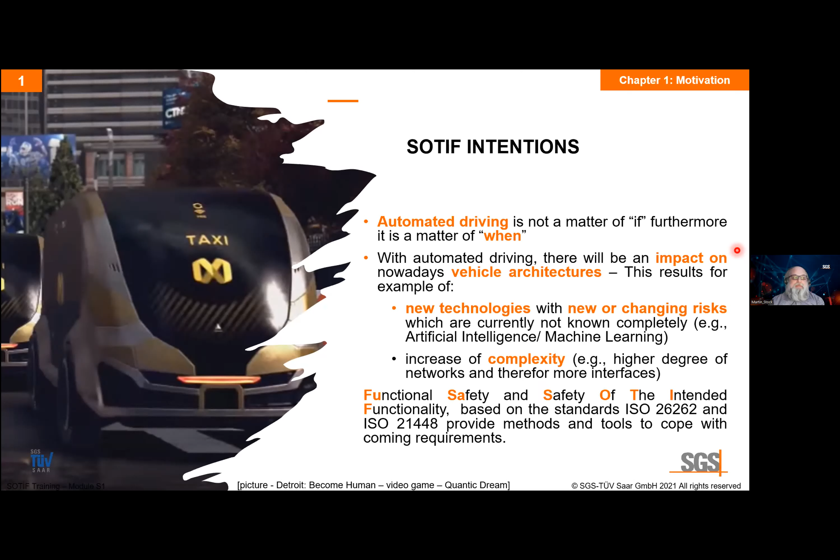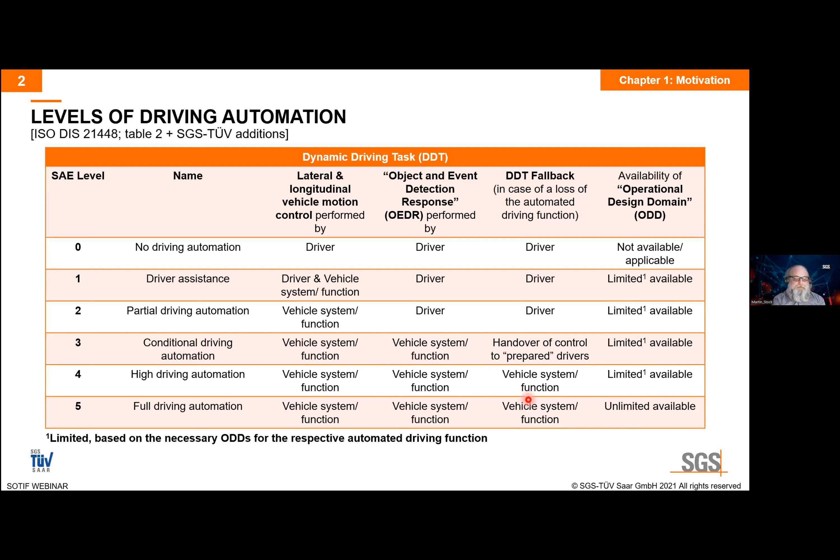So what is the operational design domain? And here I take the definition of SAE J3016 because the definition in the SOTIF standard is not so precise. I think this definition is a bit more elegant, let me say it like that. And the ODD is the operating conditions under which a given driving automation system or feature thereof is specifically designed to function, including but not limited to environmental, geographical, and time of day restrictions, and/or the requisite presence or absence of certain traffic or roadway characteristics.

So what does it mean? When the ODD is unlimited, we have a limit, of course. The limit is the world. So cars are not going to space. So we have a kind of limitation, which is our world. And the operational design domain is, let me say, a restricted set or outcome of the world.

So what we can do is we can do restrictions concerning the roads where the function is allowed to work. So for example, only on highway and not on country roads, not on city roads, not off-road. We can also put in restrictions concerning the vehicle speeds which are allowed, or environmental conditions like no snow and ice, no high temperatures, or no wet roads or something like that.

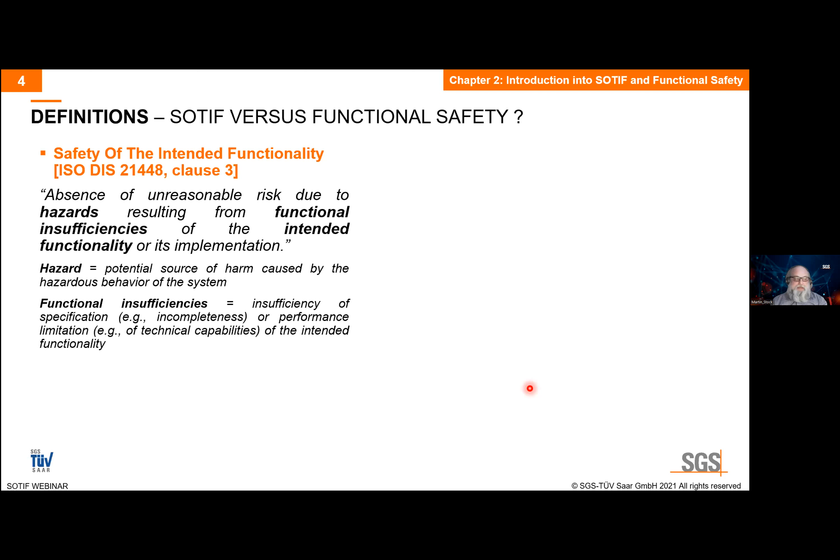We have a definition for hazard, which is a potential source of harm caused by the hazardous behavior of the system. And we have a definition for functional insufficiencies. These are insufficiencies of specification, for example, incompleteness, or performance limitations, for example, of technical capabilities of the intended functionality. And the intended functionality is a specified function on vehicle level.

When we have a look at ISO 26262, it is absence of unreasonable risk due to hazards caused by malfunctioning behavior of EE systems. Unreasonable risk is risk judged to be unacceptable in a certain context according to valid societal moral concepts. The term hazard is equal in both standards, and the malfunctioning behavior is a failure or unintended behavior of an item with respect to its design intent.

And of course, EE system is a system that consists of electrical or electronic elements, including programmable electronic elements. At least it is a set of sensors, controllers, and actuators. So what you see here is that SOTIF is inherently a part of functional safety, and therefore SOTIF based on ISO 21448 is a logical complement to functional safety as specified in ISO 26262.

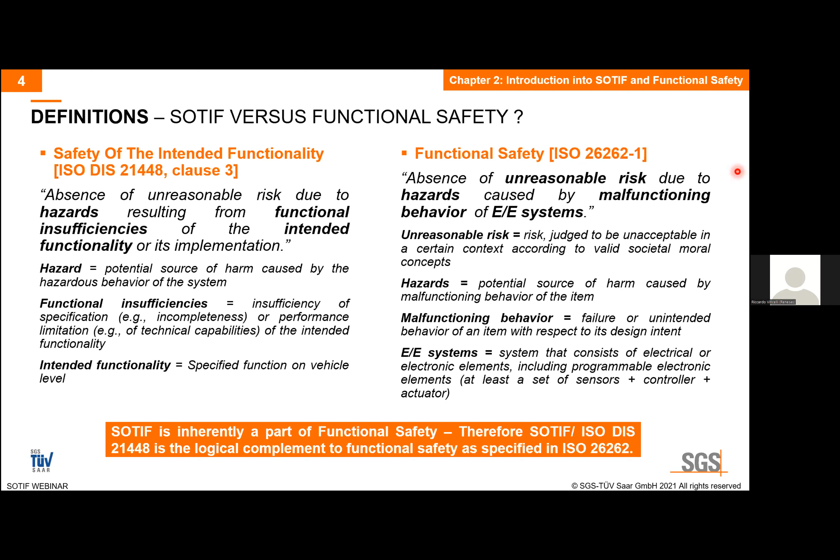So what are causes for unreasonable risk? When we have a look at ISO 26262, we have to observe the malfunctioning behavior of EE systems at vehicle level. So it could be unintended acceleration, deceleration, loss of acceleration, loss of deceleration, or in general, unintended vehicle motion.

When we have a look at the functional insufficiencies at the vehicle level based on ISO 21448, there we have incompleteness of environmental specification, for example, temperature areas, and incorrect specification of maximum vehicle speed or vehicle weight, for example. And we have the performance limitations, which can be a limited and not considered perception range of a sensor, or overestimated and therefore limited braking assistance, for example.

So dangerous situations due to functional insufficiencies in accordance with the SOTIF standard can lead to the same or more severe hazards as from malfunctioning behavior in accordance with ISO 26262, or they can cause new, previously unknown hazards.

So let's talk about the safety issues causality classification scheme, which shows directly what is part of ISO 26262 and what is part of the SOTIF standard. So in general, we have functional safety issues. These are subdivided into causality class 2, which is related to random hardware issues, so random hardware faults. And we have causality class 1, which means systematic related issues.

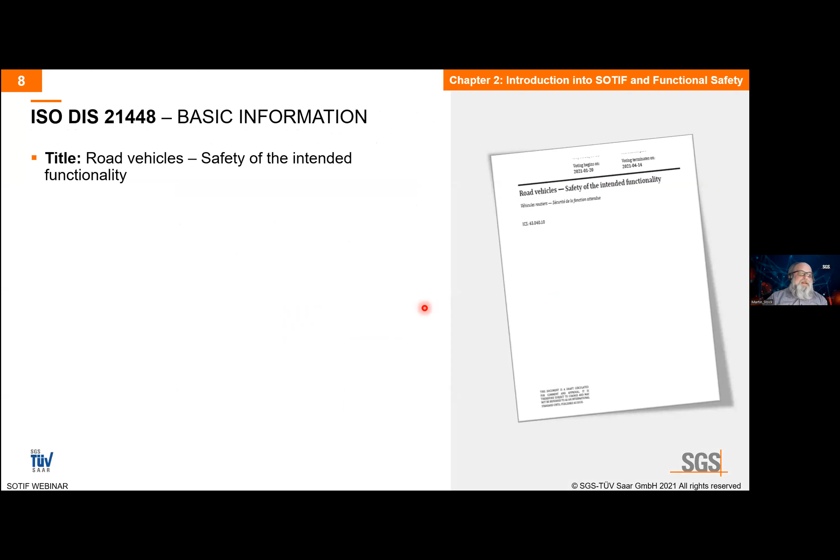So let's talk about the standard itself. Title: Road Vehicles, Safety of the Intended Functionality. The actual version which is available is the draft international standard. Still valid version is the ISO PAS 21448 from 2019. And this presentation is based on the DIS version from 2020. Just a hint for you, the PAS version has 68 pages and the DIS version has nearly 180 pages. Normative content are the clauses 5.1, 6.1, 7, 8, 9, 10, 11, 12, and 13 with their work products. All other clauses are only informative.

And which is also new in the DIS version, we have tables there. The intention of the tables is to support the development activities by providing measures and methods which can be used for specific activities. But the methods and measures listed in the tables are not weighted regarding their priority of application. So the tables you know from ISO 26262, where we have recommendations of use, you will not find in the SOTIF standard.

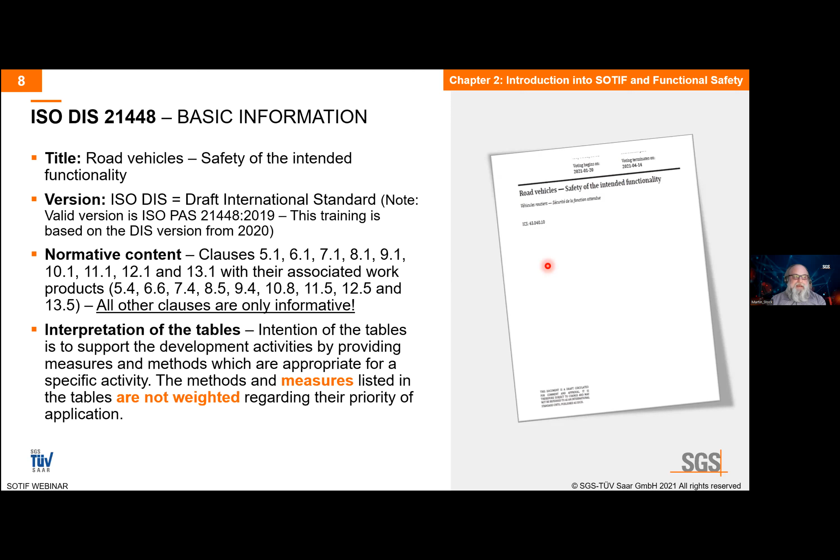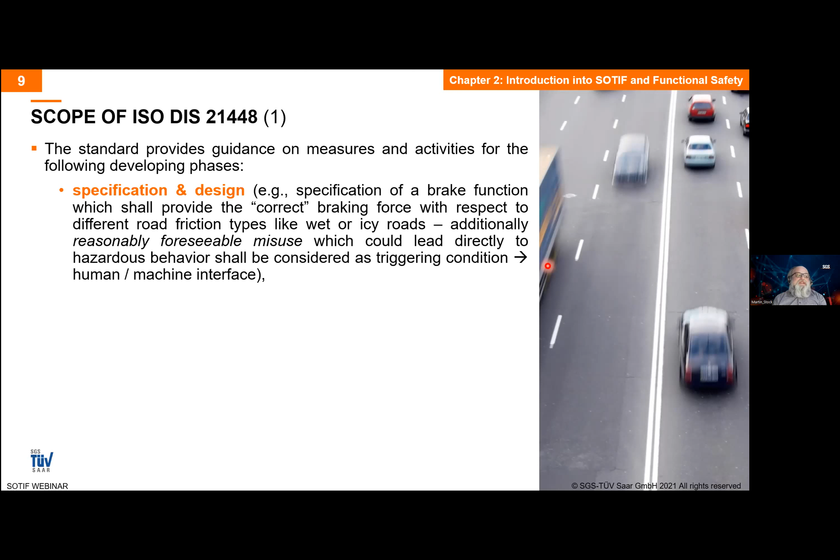What is the scope? The standard provides guidance on measures and activities for the following development phases. First is specification and design. So for example, when you specify a brake function, which shall provide the correct braking force with respect to different road friction types like wet or icy roads. Additionally, reasonably foreseeable misuse, which could lead directly to hazardous behavior, shall be considered here as a triggering condition.

Then we have the phase verification. So reviews, test cases which cover all relevant scenarios, or injection of potentially dangerous triggering conditions. Validation, for example, long time tests, and operation field monitoring of SOTIF incidents. And this is for functionalities where proper situational awareness is derived from complex sensors and decision or processing algorithms, for example, for automated emergency intervention.

The standard is applicable to an intended functionality where proper situational awareness is essential. And the standard says that it can be used for automation levels 1 to 5. I personally disagree with that. The standard fits very perfectly for level 3, not so perfectly for level 4, and from my personal perspective, not for level 5, but it's my opinion.

So compliance with local driving laws, policies, or other road norms is excluded, but cases where not following laws and rules of the road could lead to safety hazards are in scope. Sorry. Other safety domains, for example, hazards caused by other technologies like mechanical systems, are excluded. For these, you shall use other standards, for example coming from the Machinery Directive, EN ISO 12100, and so on. And hazards caused by attacks, so security hazards, are also excluded. Therefore, you have to take a look into ISO SAE 21434.

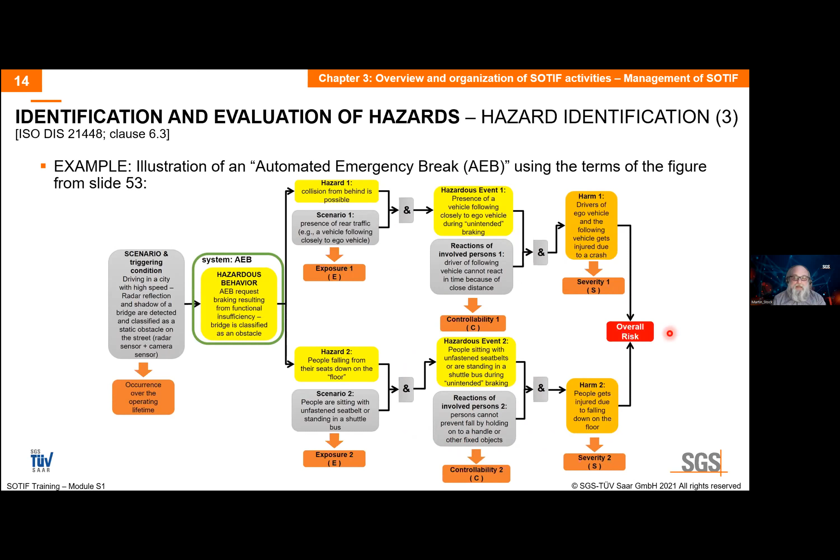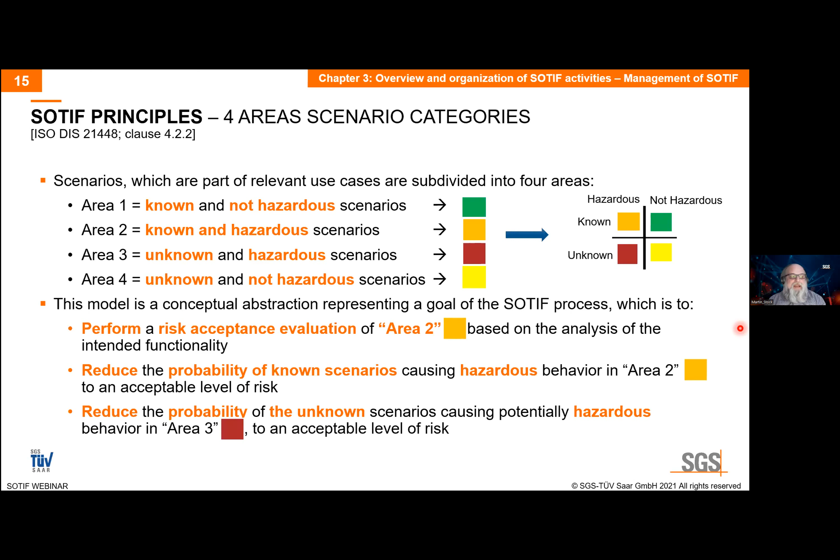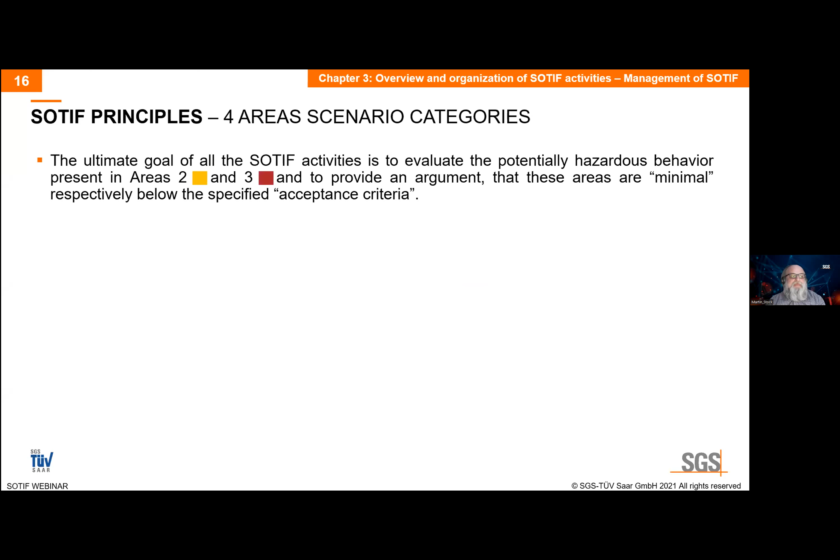And we have to reduce the probability of the unknown scenarios causing potentially hazardous behavior in area 3 to an acceptable level of risk. So ultimate goal of SOTIF activities is to evaluate the potentially hazardous behavior present in area 2 and 3, and to provide an argument that these areas are minimal, respectively below the specified acceptance criteria. So we want to change this to this. And it is expected that the residual risk will be reduced in the areas 2 and 3, and the confidence of safety will be increased by the growing scenario set in area 1.

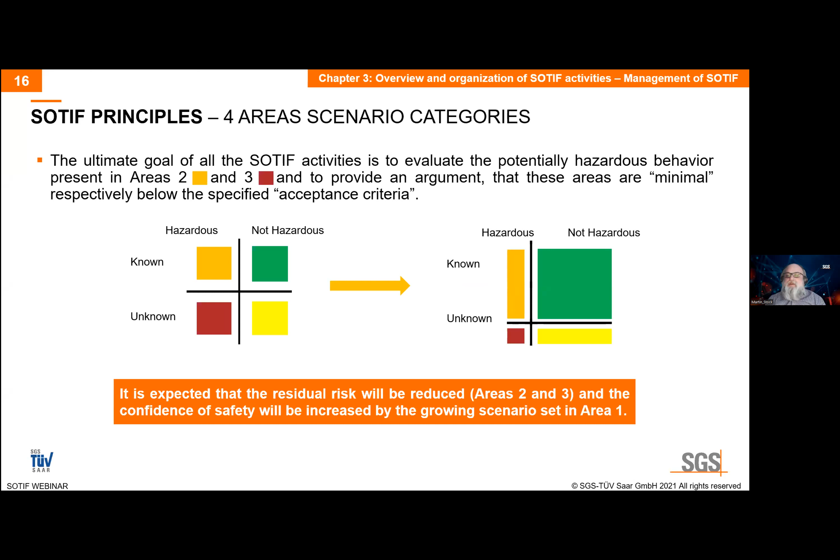So, summary of the activities. Area 1: here we want to maximize or maintain the set of known scenarios while minimizing areas 2 and 3, retaining or improving the safe functionality. Area 2: we want to minimize this area with technical safety measures to an acceptably low level with statistical significance. And we evaluate the potential risk and move the hazardous scenarios to area 1 by improving the function or restricting its use. It's also an option we can do.

Area 3: we want to minimize this area as much as possible with an acceptable level of effort with statistical significance. The problem is that we don't know how many unknowns we have. So the question of what is an acceptable level here, when I don't know the whole amount of these areas or hazards, makes it very difficult. And area 4: if unknown, not hazardous scenarios are discovered, they can be documented and reported, and this helps to maximize area 1.

The last principle: the sense, plan, act model. The hazardous behavior is closely related to the performance of sensing the environment, planning of actions by using decision algorithms, and providing an action where the HMI is included. To provide the intended functionality correctly and safely, we always have to talk about sense, plan and act. So the appropriate selection of a capable system architecture is a very important consideration to ensure SOTIF and overall capability, and corresponding activities take place both at early stages and throughout the whole development lifecycle.

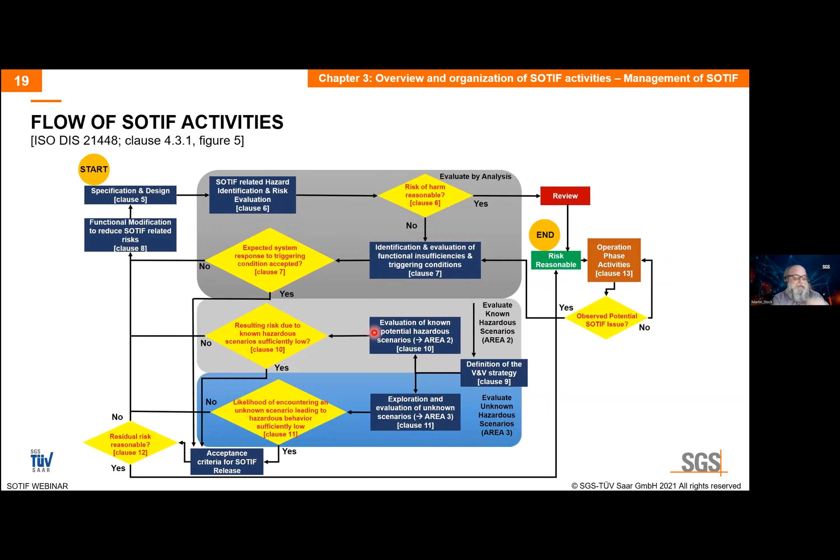Then I have to evaluate the known potential hazardous scenarios, which was area 2. If the resulting risk is sufficiently low, I can go to the acceptance criteria and operating phase. If not, I have to do modifications and make this loop again. Same for the unknown scenarios. When the likelihood of encountering an unknown scenario leading to hazardous behavior is sufficiently low, I can go directly to the operating phase. If not, I have to do some modifications.

So when we talk about safety of functions, we have to do some activities, supporting processes, and of course management. When you want to be complete, you always start with quality management, for example based on ISO 9001, IATF 16949, or ASPICE. Developing a safe product is not possible without a strong basement, so a quality management system or process is absolutely required. Then we have general safety management based on standards, for example the machinery directive, to cope with mechanical safety, chemical safety, electrical safety, and so on.

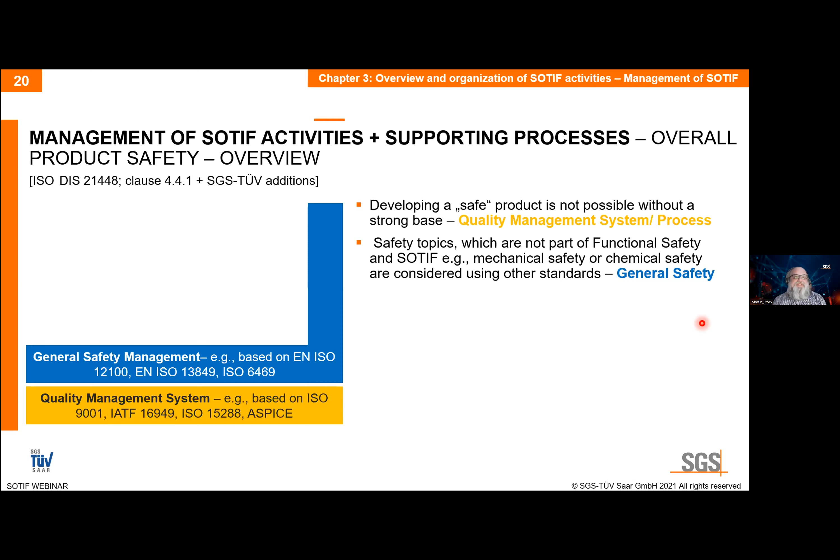Then we have the safety of functions, which is always a combination of functional safety based on ISO 26262, SOTIF 21448, and security ISO 21434. So functional safety of ISO 26262 is now only a part of the safety of functions. When you want to make functions completely safe, you have to talk about these 3 standards and this type of management. And on top, for automated driving, we have a lot of standards which are still in work, for example ISO TS 5083, I'm part of this group, which is safety and security for automated driving. Then we have ISO PAS 8800, which is an AI-specific standard for automotive, and other standards.

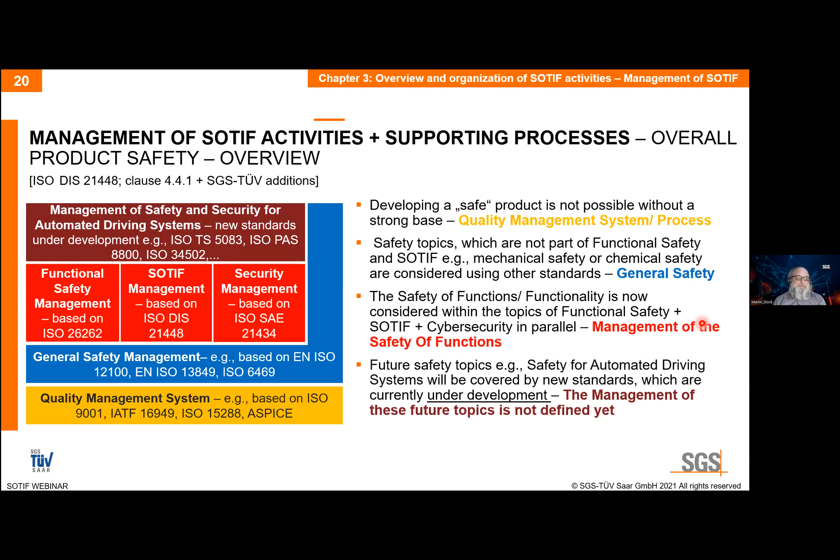So let's talk at the end about AI-specific content of the SOTIF standard. Safety for machine learning hardware: following the SOTIF standard for hardware safety of machine learning applications, ISO 26262 and SOTIF shall be considered, to cope with random hardware faults and systematic hardware faults following ISO 26262 part 5, and performance limitations following ISO 21448. Then for software, tools used as part of the offline training process, for example, are handled by ISO 26262 part 8 clause 11, confidence in the use of software tools.

Machine learning, they say, is some form of software which generates an output from the input using specified computing operations, like matrix multiplications, discrete convolution or nonlinear functions. To this effect, it's by itself not different from other non-learning algorithms and can be verified by conventional means. This means the implementation of computing operations can be verified according to ISO 26262 part 6.

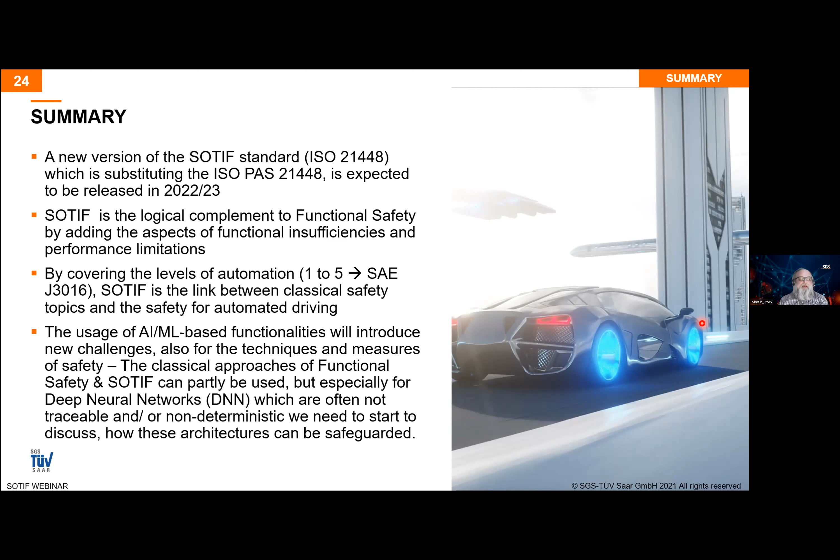safety. The classical approaches of functional safety and SOTIF can partly be used as seen before, but especially for deep neural networks, which are often not traceable and/or non-deterministic, we need to start to discuss how these architectures can be safeguarded.

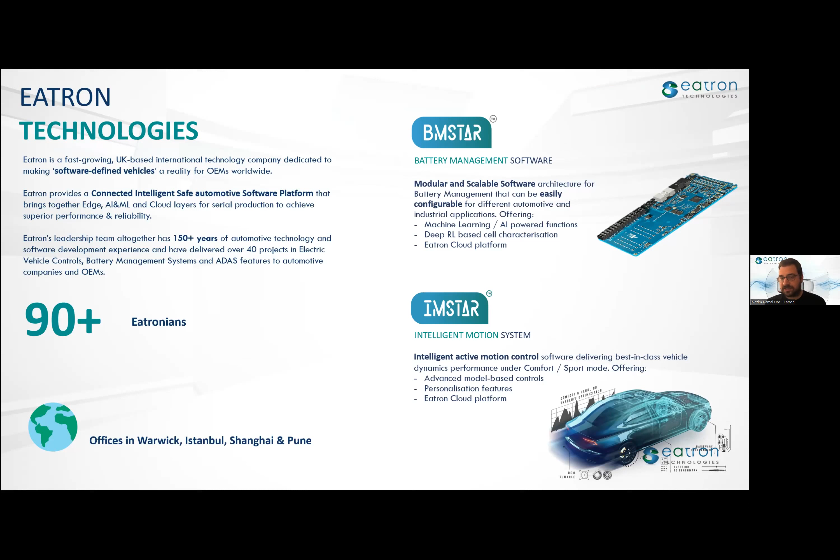So one of them is a BMS software, which has a lot of AI functionalities. Then the other one is a motion control system, IMStar, which also has a lot of AI functionalities. So just briefly to talk about this, in the battery management systems, what our AI systems are doing is basically smart battery cell diagnosis and remaining useful life prediction. And we are developing a lot of machine learning software to perform these tasks very accurately.

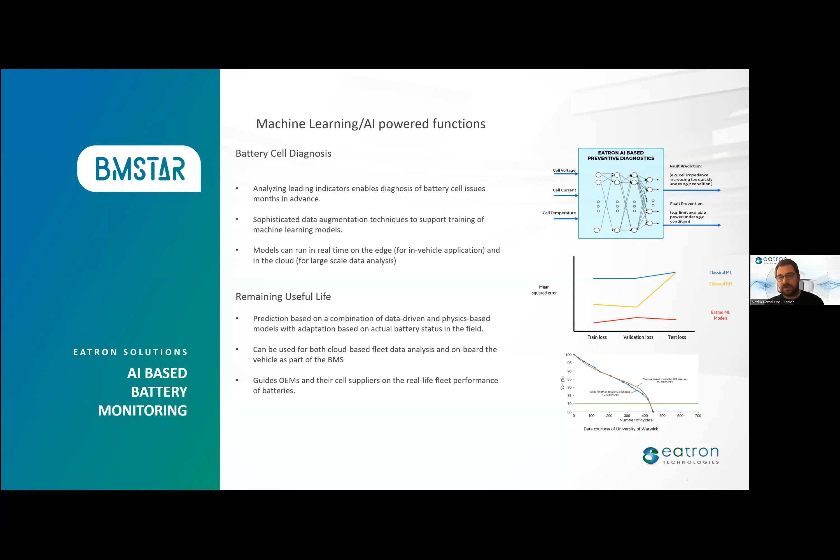By using data from lots of different resources, we can highly accurately predict the remaining useful life of your current battery, or if something goes wrong with your battery, how you can diagnose that, etc.

And the other product, IMStar, is basically like an ADAS system. So we have got a perception system installed on the vehicle, and it can actually detect road conditions, whether the road is bumpy, or there's a hole on the road, or there are dangerous driving conditions, and it can automatically adjust the motion control software, the suspension control system, to accommodate for that.

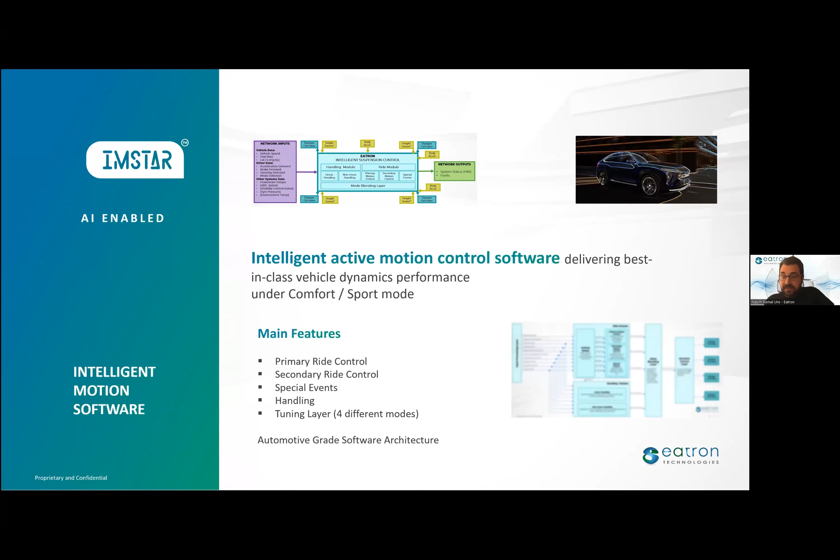So it is a combination of perception and decision-making AI. So these are the two products we have, and we have been applying AI to them a lot. And obviously, addressing the performance verification and safety is a big challenge for us, and we have been actively working on that too.

So first of all, I'm going to take a look at a little bit of the general scene regarding autonomous vehicle technology. So why it is so hot right now. What are some of the recent advances? Since I know this audience is actually very well versed in that topic, I'm going to keep this short.

And then I'm going to move into more the technical part, like what are the challenges we have in verification of safety and performance of these autonomous vehicles? What are some of the algorithms that are out there? What are some of the approaches for verifying the performance? And then finally, I will talk a little bit about the research we do at Eatron Technologies in order to address these problems.

Okay, maybe this doesn't need the introduction, but of course, we all know that in autonomous driving technology, there were tremendous improvements in the last 20 years, maybe more so in the last 10 years. So now we've got perception systems that can simply look at the road, and they can infer the state of the traffic. They can even predict how the traffic is going to flow, whether there are pedestrians on the scene. Are they going to make some hazardous moves?

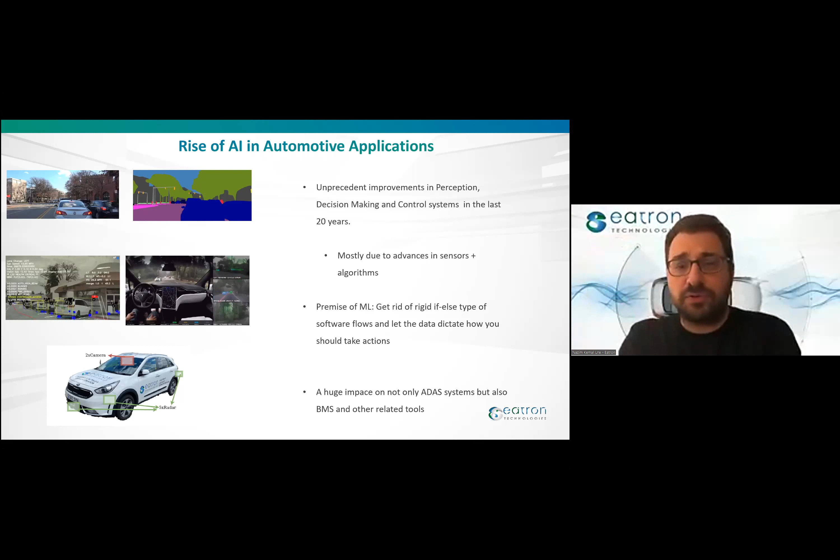We also have amazing perception, decision-making and control systems that can very accurately control the car up to some specifications. So these were kind of like dreams 20, maybe 30 years ago, but now it's a very strong reality. And this is mostly due to advances in sensors and algorithms, especially advanced sensors and hardware. They came a long way. So now we can collect much more reliable data. We can process data much more reliably.

But on top of that, we also had amazing algorithmic improvements in the last 10 years, mostly thanks to machine learning and especially deep learning. So advances in deep neural networks, the algorithms and the way we train them, enabled us to solve perception and decision-making problems to unprecedented levels that we haven't seen before.

And if you look at the premise of machine learning, like why machine learning is so useful for a problem like this, this is actually my personal opinion. Different people might find different uses of machine learning, but to me, the biggest advantage of using a machine learning system is that it actually kind of frees you from writing these conditional statements in your software.

So whenever you engineer a system using a classical way, that system is only good up to your specification of your parameters. So the system is not going to work right all the time. So what you need to do is write all of these conditional if-else like statements, right? You are going to say that, well, there is this edge case. If we encounter this edge case, we are going to use these parameters. If we encounter another edge case, we are going to use that set of parameters.

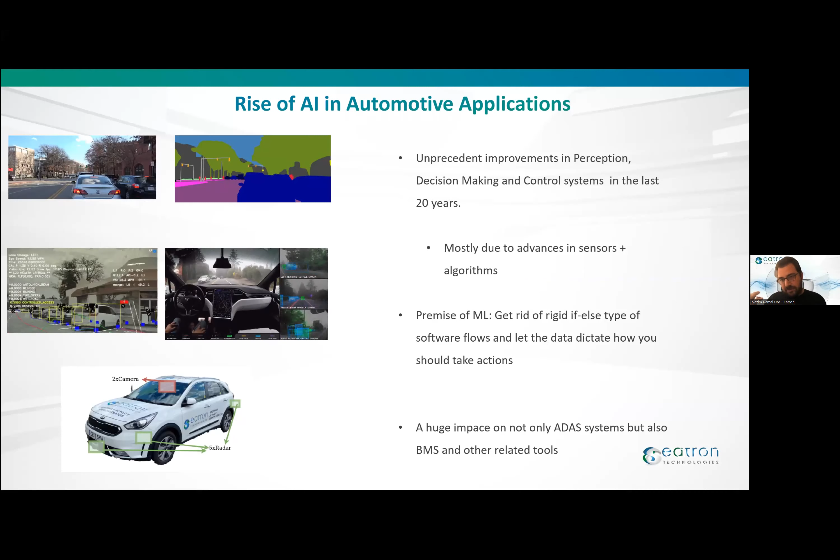This has a lot of benefits, especially in the environmental and social impact. Usually autonomy and electric vehicles go hand in hand together. So there's also a lot of environmental benefits, but of course, the improved safety is, again, one of the main advantages, right? Because in theory, an automated car should be safer than a human driver if we did everything right. Because computers can process information much more reliably, much more quickly, and they can also execute decisions much quicker than us. So in theory, if we do everything right, an autonomous vehicle should be safer.

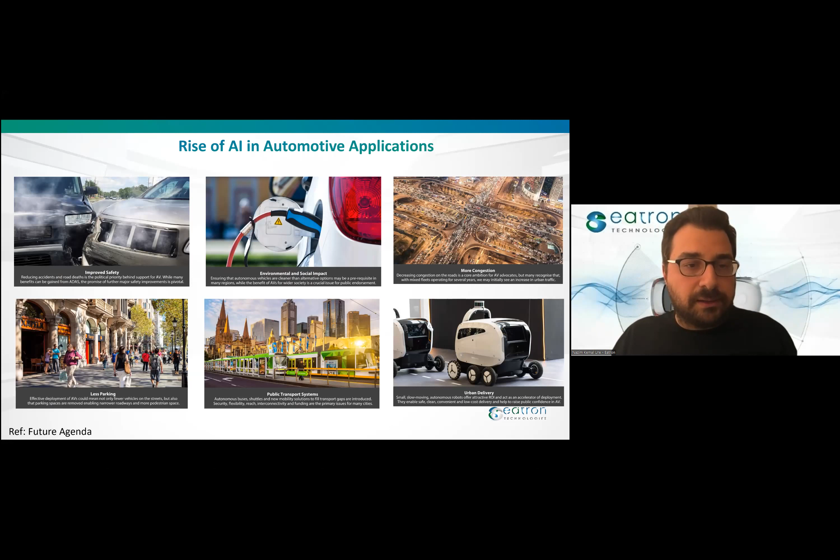And similarly, because an autonomous vehicle is not making suboptimal tactical decisions, this should also lead to improvements in congestion. So again, these are all potential benefits of autonomous vehicles. And if you look at some statistics, we can see that the market in autonomous vehicles is also increasing, and also people's perception regarding autonomous cars is also improving.

Autonomous vehicles is a scary technology, right? I mean, whenever you say you are going to get in a car that is not going to be controlled by a human driver, that is kind of a scary thought. The same with aircraft. But we can see that if you look at people's perception throughout the years, the percentage of consumers who think self-driving vehicles will not be safe is actually decreasing. So people are gaining more trust.

And of course, the number of vehicles with some level of automation, some of these can be low, such as level 1 or level 2, but again, the number of cars which have these functionalities has been increasing. So all of these statistics are basically telling you that we are going to see more and more self-driving vehicles with some level of automation on the roads. Each year, this number is definitely going to increase.

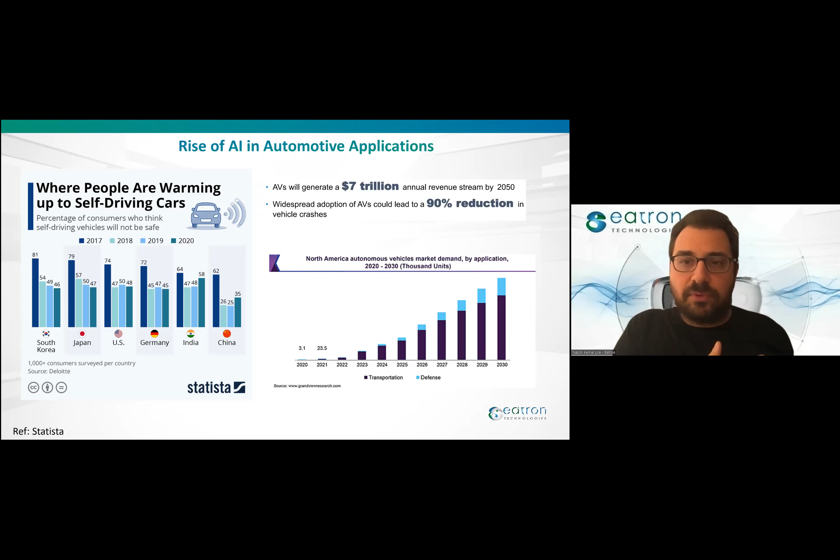And that actually leads to a very natural question: how safe is this technology actually? Because when it is only small numbers, you run into the risk of small samples. So you cannot really measure the safety by looking at the current numbers because, of course, there are extensive road tests and other kinds of statistics, but the real safety issues are only going to become more and more apparent as the number of consumers using this technology increases.

I didn't put a lot of statistics here, but if you go and look for that, you will see that most of the time, people who are working on this technology, maybe including me, will tell you that this technology is safe. But at the same time, you also keep hearing about crashes of these vehicles. There have been numerous crashes from Tesla and other companies. So again, you start to think, how safe is this technology? And this is actually a very difficult question to answer.

As Martin laid out in his presentation, these are not simple systems. They are actually very complex decision-making systems. And not only that, they are operating in a very uncontrolled and complex environment. For instance, if you are trying to validate a very simple system, such as the safety of a tire, you just have maybe 2 or 3 parameters that you need to check, like how much force or how much torque I am exerting on this tire. So the input space is actually not that big.

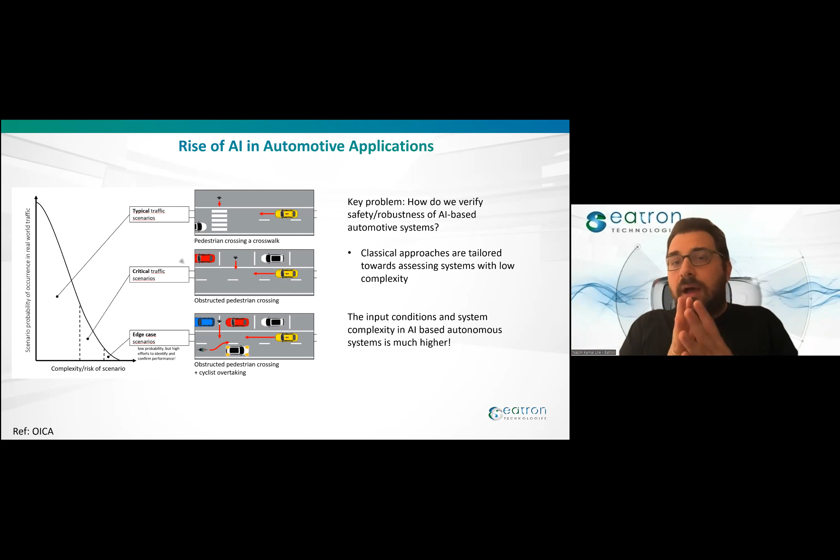You can have thousands of different traffic scenarios. Especially when you want to validate this in an urban area, there can be pedestrians, there can be different light conditions, there can be different weather conditions, etc. So the input space is just gigantic. It is too huge to apply the classical and conventional methods. So this is why we need to come up with something more creative if you really want to answer the question, is this system really safe under all possible operating conditions?

Okay, so when I was preparing the slide, I was looking for a good diagram where I can actually show there is this scenario space and there are these hazardous parts and there are these non-hazardous parts. And I couldn't find a good picture. Then in the seminar, actually, Martin came to my help. When I was watching this presentation, I immediately saw this figure and I said that is actually the figure I was looking for. So Martin, sorry, I just immediately stole this from your presentation, but at least I gave a citation to you. So I'm hoping that's okay.

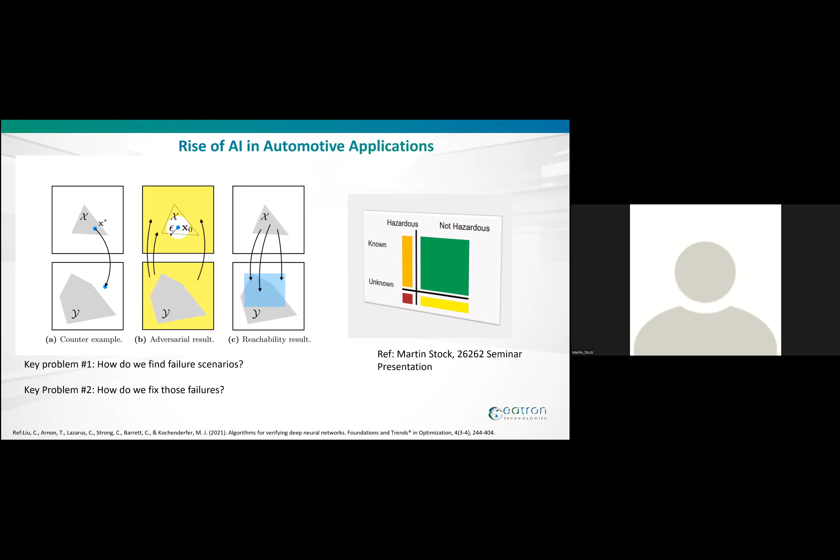So basically, that is the figure we want to compute, okay? So we have this software, and this can be any type of decision-making or artificial intelligence software. And we really want to compute this figure because it is not available in the beginning. You have some idea what this figure is going to be in the beginning from your simulations, but when you are designing a system, you usually only end up doing a small set of simulations to get some level of performance out of your system. And after you say, okay, the initial prototype is finished, you really want to compute this figure, like under what part of the scenario space I am going to run into danger.

And that actually turns out to be a very, very difficult question for an autonomous driving system, because, like I mentioned, the input space is very, very large. So this is the key problem number one. How do we find these failure scenarios? How do I know what are these areas in my scenario space where my system is going to fail? And question number two is, given that I have found these failure scenarios, and let's say that they are not at an acceptable level, so my autonomous driving system, my perception system, or whatever, is not performing at the intended level, then how do I fix this?

And this again turns out to be a very interesting question for machine learning systems, because in a classical system, if something doesn't work, you simply tune the system. But in a machine learning system, other than some hyperparameters, we don't really tune systems. We need to retrain them, because the performance of the machine learning algorithm at the end of the day is highly dependent on the data it is trained on. So whenever something is wrong with your machine learning system, most of the time you cannot simply get away with tuning your hyperparameters or rewriting your software.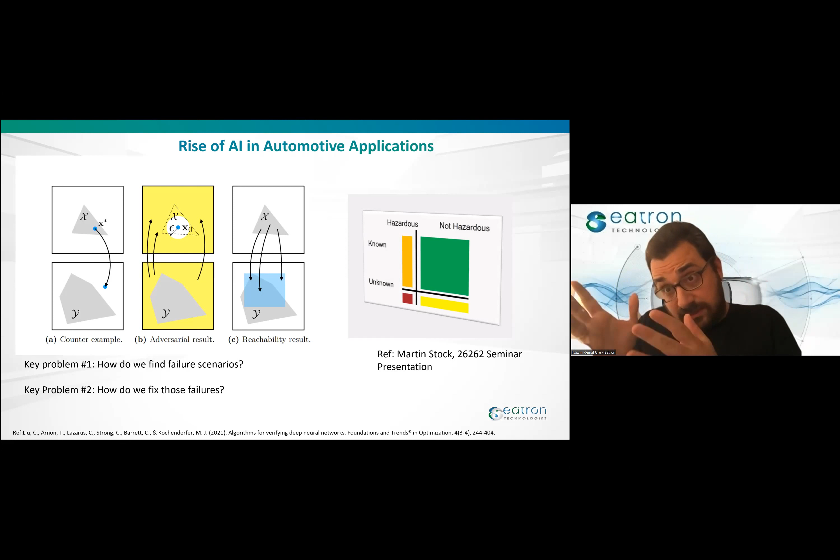You need to find more data, and that actually puts us into a very interesting loop where we need to work on adaptive data sets, dynamic data sets. So we need to continuously assess where my system is malfunctioning. Is it due to lack of data? And go and collect more data so that we can improve it. So like I said, this is usually not a standard industrial practice right now. This is mostly in the research phase.

And basically what I'm going to tell you for the rest of the presentation is what people are doing in regards to fixing problems number 1 and 2, and what we are doing at Eatron. So the rest of the presentation is basically going to be about that. And if you want to read a perfect survey on all of these methods, like algorithmic approaches to verification of safety of neural network-based systems, you can go check out this amazing survey by my friends at Stanford University.

Okay, so here's a brief survey, and it is really a brief survey because if you, for example, search for algorithmic approaches or verification of autonomy systems by black box verification, you will only find a few papers in the past, but it has been picking up. People are realizing that this is actually a very hot problem, an important problem, and there have been a couple of important advances in the recent years.

But of course, if you just look at black box verification or verification of machine learning systems, in the last 10, 15 years, you will find hundreds, thousands of papers. In here, I'm just going to focus on algorithms which are mainly focusing on verification of autonomous systems, especially self-driving cars.

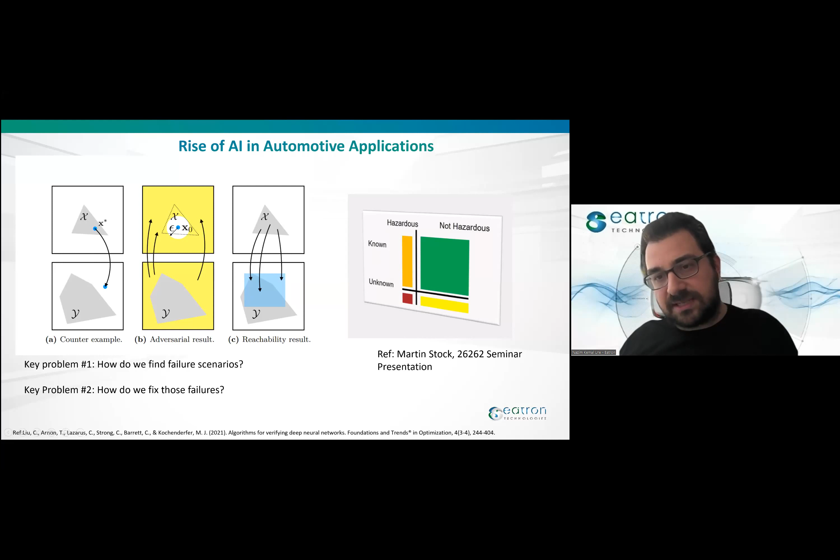In the beginning, this part of the graph is very, very small. And by using these algorithmic approaches, we want to enlarge this part. And if this part is not at an acceptable level, that is where key problem 2 enters. How can we take weights from this area and put it into the not hazardous area? And that part will come later.

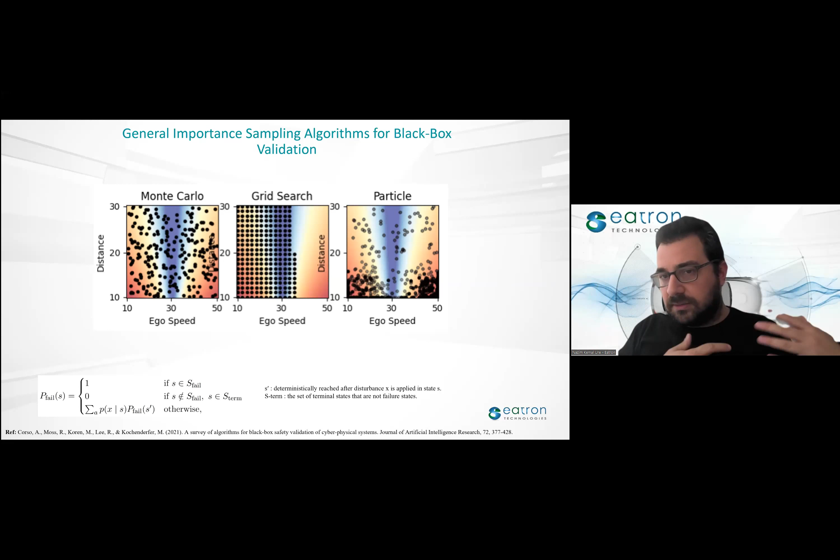Okay, so sampling approaches, so they are actually the main methods that we use in order to assess system safety for complicated problems like this. And there have been a lot of different sampling strategies. So this is not going to be a too technical presentation. So I'm not going to go into the details of these algorithms. But of course, people have been working on different algorithms, and there's been recent publications on these topics.

For example, very recently in 2019, there was this work on verifying the safety of the OpenPilot. So OpenPilot, as the name implies, is an open source autopilot that you can just download and put in your car, and it can handle a lot of nice automated driving functionalities. It mostly works in an end-to-end manner.

So in this work, what they did is they took the OpenPilot, and of course, you cannot always afford to do a real hardware test. So they tested it in simulation, which is Carla, a very popular open source simulator. I'm sure most of you heard about this. So the question here was, if I put the OpenPilot on Carla in a simulated system, by using sampling strategies, can I find the conditions where this OpenPilot is going to fail?

And in this particular functionality, we are looking at camera and radar as inputs, again, very popular inputs for autonomous cars. And you can see that it kind of works in an end-to-end manner. After applying neural networks to both of these inputs, we fuse them and we do both longitudinal and lateral control. And in this case, what they are going to look at is, for example, what is the maximum velocity, what are the different light and weather conditions, what are the NPC behaviors, for example, the behaviors of pedestrians, etc., and what level of sensor noise we can tolerate in order to make this work.

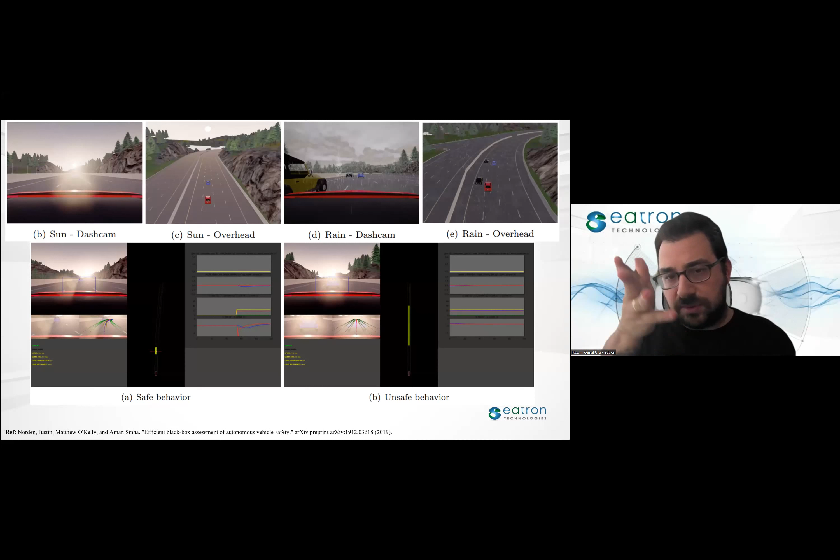So you can try to manually engineer these kinds of scenarios, but like I mentioned, there are thousands of different parameters. So it's actually very difficult to engineer a scenario like this manually. But these algorithms can search this space very efficiently, and they can tell you, hey, your algorithm is going to fail in this particular scenario.

And there are other approaches and software that you can try out as well. There's this trustworthy search engine, which is actually a product of this company, Trustworthy AI. And this is actually an open source tool. You can take your open source algorithm and send it to them, and their statistical verification engine will run a lot of different scenarios. They will change stuff such as road conditions, different sensor resolutions, different traffic conditions, etc., and they will basically assess whether your algorithm is working as intended or not.

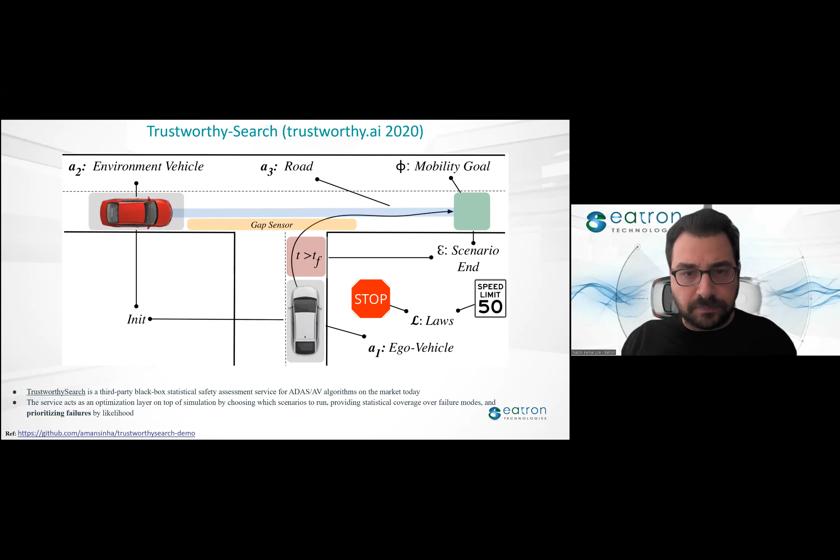So these are all very interesting scenarios that we need to be aware of whenever we are trying to design an autonomous vehicle system. And like I mentioned, it is very, very difficult to find these kinds of scenarios manually, but black box optimization and algorithms can help.

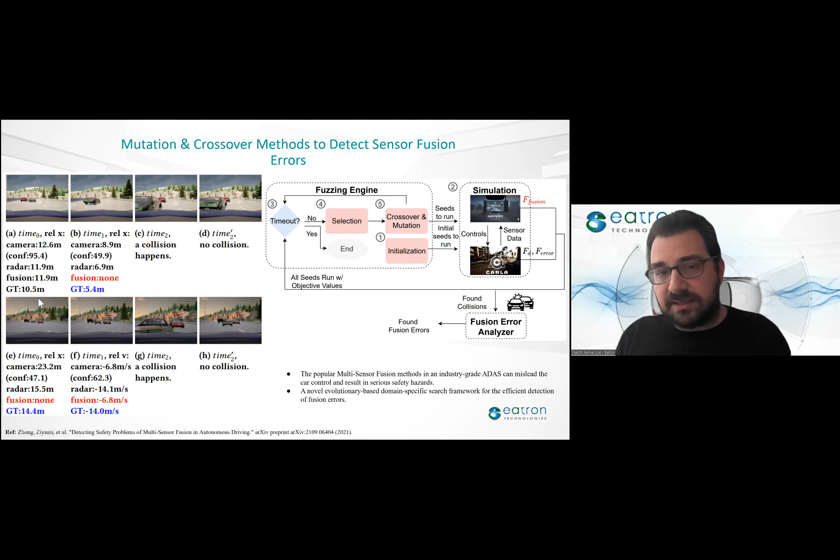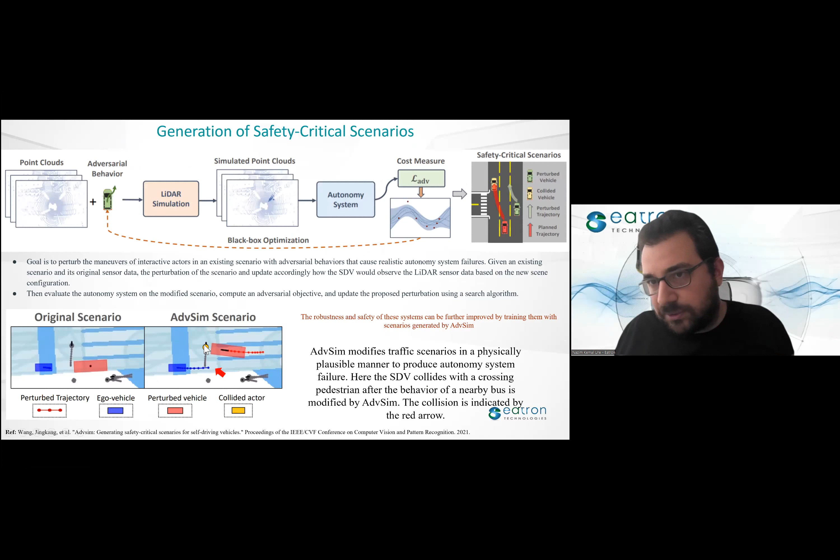For example, I know that my sensors are not that good. What should I do? Should I change my fusion algorithm? Should I get better sensors? Or if you look at, for example, this scenario, let's say that this was an AI agent who made this decision. Okay, now I know that this is a failure scenario, but what do I do? Do I need more data? Do I need to calibrate my algorithm?

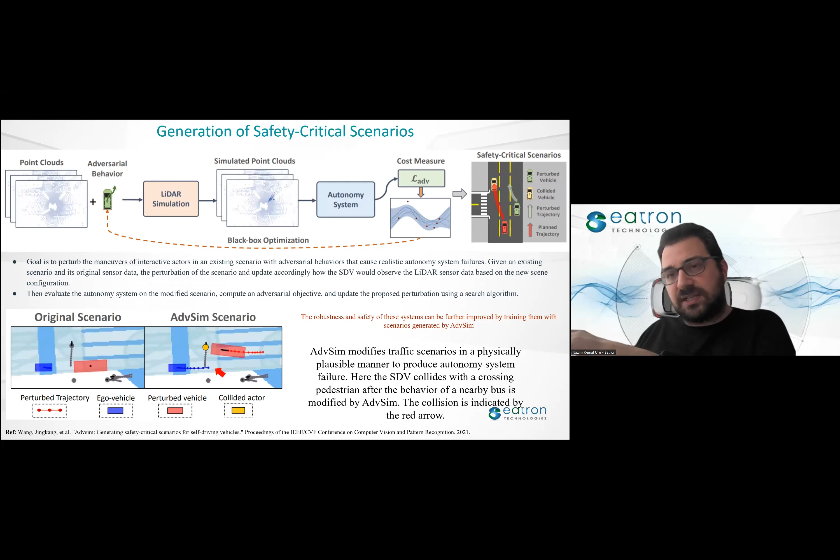So we will see that most of the time, the best way to fix a machine learning algorithm is simply to train it on more data. And we will see that by closing the loop here, retraining your algorithms on the data explored in the safety critical part of your scenario space is almost always guaranteed to improve your performance there. So that's actually what we're going to see.

Okay, so I'm going to talk about three different applications. The first one will be about fixing the simulation gap. I'm sure this is again a term that you already heard before. Most of the AI algorithms are trained in simulations because of the constraints on doing real life tests. But then if your simulator performance doesn't match your real life performance, then what do you do? I mean, obviously, you need to fix something. So we will be talking about fixing the simulation gap.

And second, we will see that most of the decision-making algorithms, if run by an AI, are usually some sort of reinforcement learning algorithm. So this is not the industry standard, but most of the time, when we are talking about AI making decisions, it means that it is a reinforcement learning agent of some sort. And like supervised learning algorithms, reinforcement learning agents are also prone to making failures if they are not properly trained.

So we will be looking at methods where we try to discover when an RL agent is going to make a mistake and how do we fix it adaptively. And finally, we will ask the same questions for end-to-end agents. So again, imitation learning is probably something that you have heard before. If you haven't heard about any of this stuff, no problem. When I start to talk about these areas, I will do a very brief summary of what this stuff is.

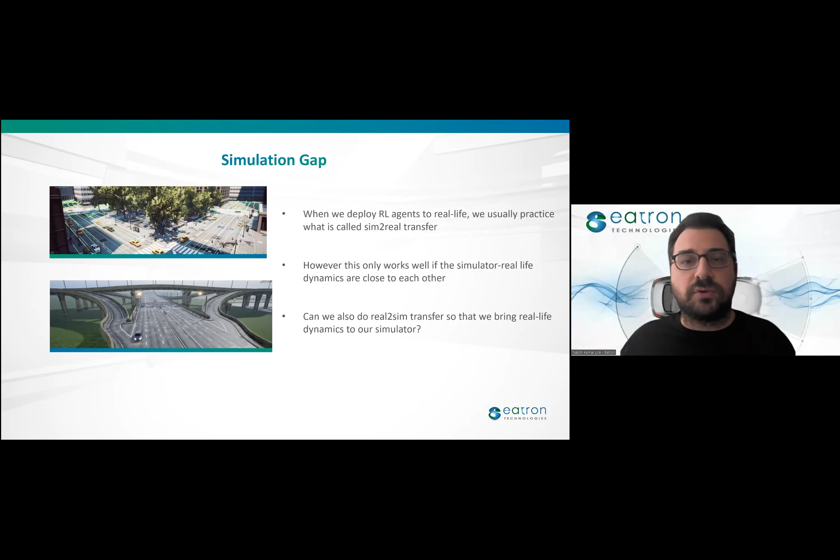And obviously, the simulation is not necessarily going to match the real life conditions. And then what do we do? So this is called the simulation gap. Your simulator which the AI algorithm is trained on is not 100% reflecting what real life is doing. So our answer to that is basically a closed loop architecture. Instead of just training on the simulator, testing it in real life and ending it there, we actually close the loop. After we train everything on the simulator, we execute real world tests, and with the data that we collect from the real world tests, we go back and update our simulator to make the dynamics of the simulator look more like real life.

And the key component here is we are actually updating the dynamics of the simulator, not necessarily the graphics of the simulator. Because sometimes when people think about realistic simulators, they only think about the quality of the graphics, but that's only one part of it. Actually, when you want to train a realistic reinforcement learning agent, the vehicles, the surrounding traffic, need to act like real traffic. They cannot be simple, super straightforward pre-programmed agents. They need to act like humans. And how can we get human data? Well, we can go and do real life tests. So this is how we actually train our reinforcement learning algorithms at Eatron Technologies.

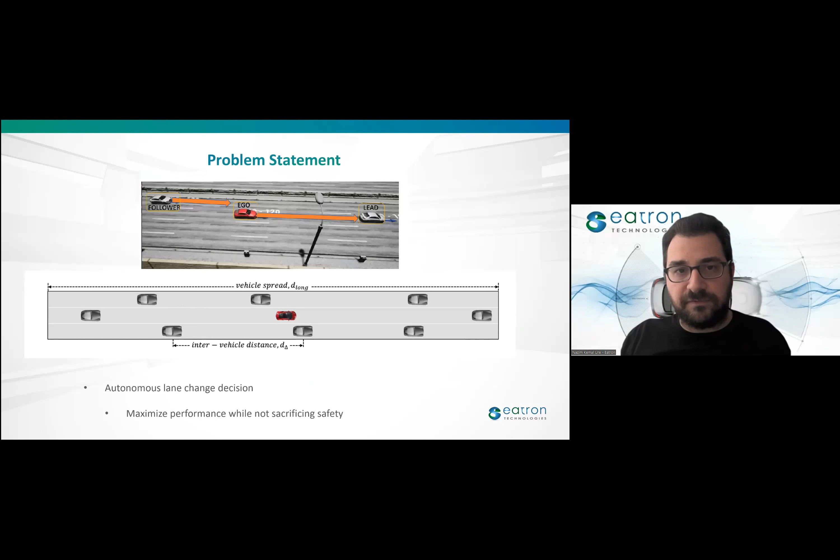So here I'm going to show it to you, phase by phase. First, of course, we do the initial simulator training, and then we go and do the real world tests.

And after we do the real world tests, we are going to actually acquire a lot of data regarding our surrounding traffic. For example, we are going to get a distribution on what are the lead vehicle positions, what is the distribution on lead vehicle velocity, etc. So this kind of statistics actually gives you a pretty good idea on what are common traffic parameters, like what kind of traffic I can expect when I go and do this kind of road tests.

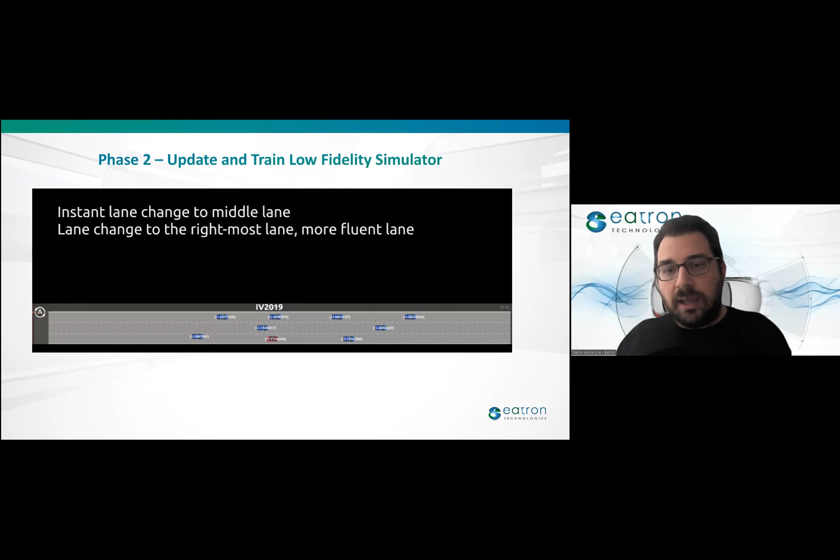So then we simply took these parameters and updated our traffic simulator to match the real life. And then once we do that, we simply get a much more realistic traffic behavior in our simulator. And for the simulator, actually we have two simulators. The first one is a low fidelity simulator where we do not care about graphics or most of the low level dynamics at all. So this type of simulator is more like a computer game, a very simple Atari game actually, not even a computer game.

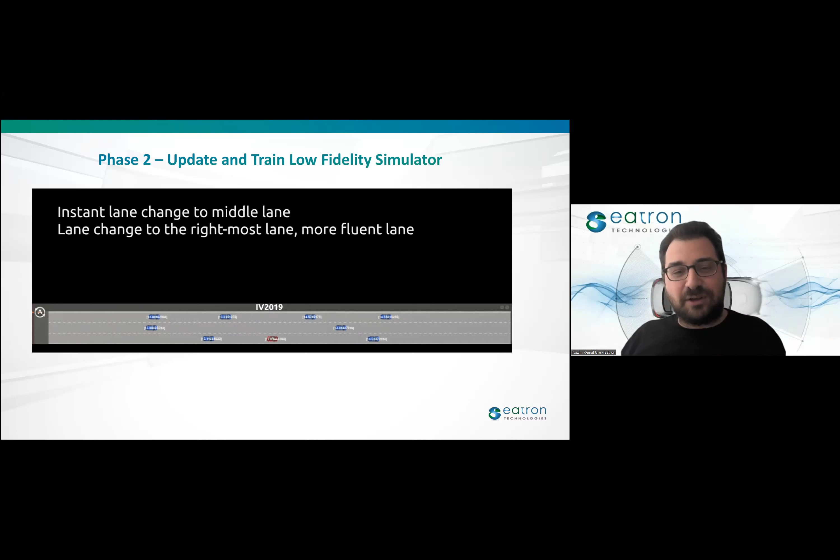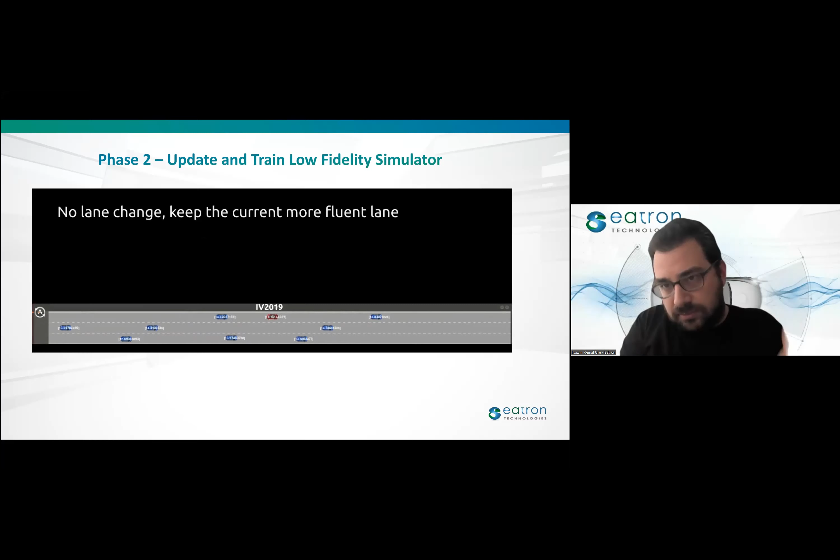But we need low fidelity simulators because they are super fast. Simulating stuff in here is very cheap, and reinforcement learning agents usually need millions and millions of samples to get to some level of accuracy. So first we got this Atari-like environment where we train our algorithms. And of course, this is very crude, this is very simplistic. Then we go into more realistic simulators, which is again our own original software called SimStar.

So, oh, there's music, sorry.

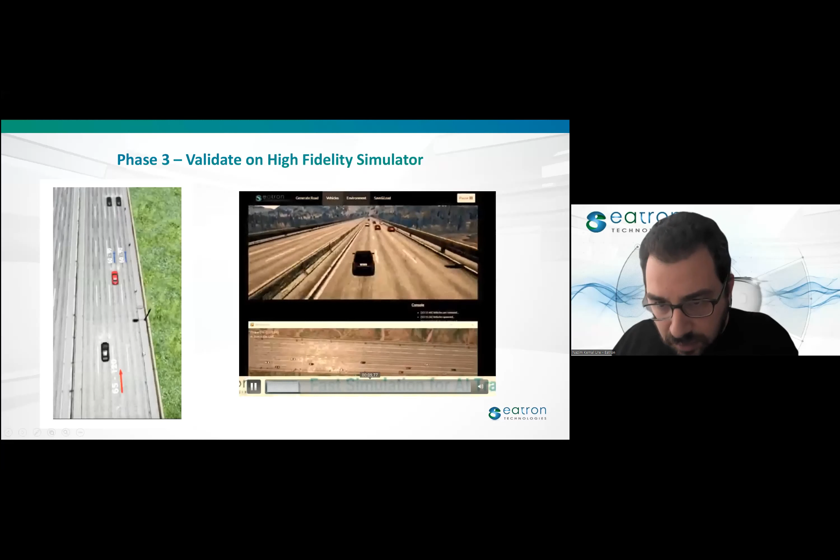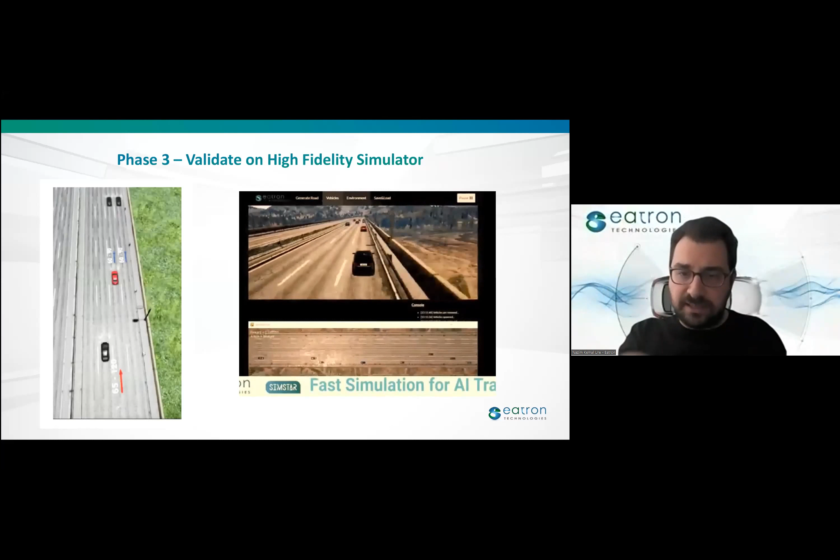And in here, all the cars are not simple models anymore. There's actually dynamics, the road conditions and everything, even the perception system, everything is simulated perfectly in here. And you can also do hardware in the loop tests in here. So after we validate our algorithm on this setting, now we say that, okay, now the car is ready to be run on the actual road tests. And then we go and perform the road tests. Then after a couple of iterations between the real life and the simulator, everything is amazing.

So we have done this hundreds of times. I do not remember the actual statistics now, but this has been validated on both roads of Istanbul and the United Kingdom, and our lane changing performance, the lane changing capability, improved significantly after we started closing the loop. So one way to ensure the safety of the simulator is to make the simulator look more like real life. And how do you do that? By adaptively changing your simulator. So this was the main takeaway we got from this experience.

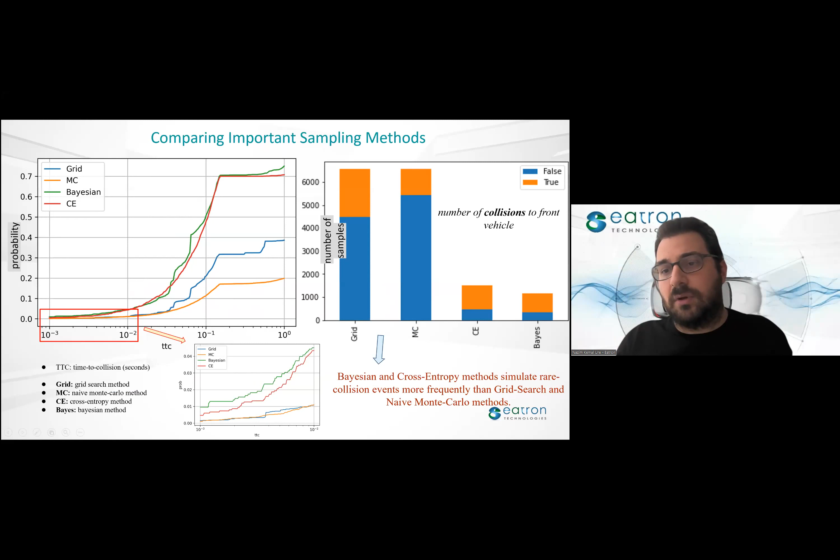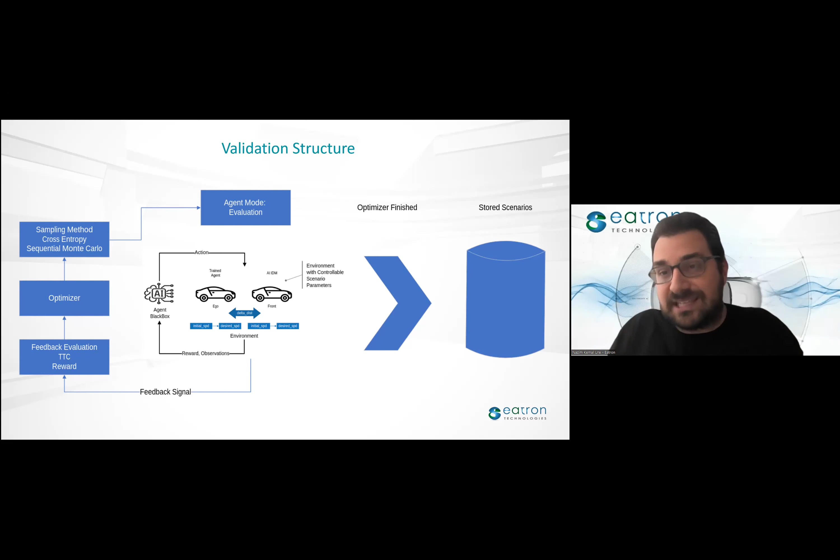So what we do in this work is we run all these algorithms and collect these scenarios. After we collect this library of scenarios, the question we ask is: given that these are my failure cases, how should I retrain my algorithm so that it doesn't fail anymore? There are different things you can do at this point. For example, you can look at each sample scenario and merge all of them into a gigantic training library, and then train your algorithms on everything that you have seen so far.

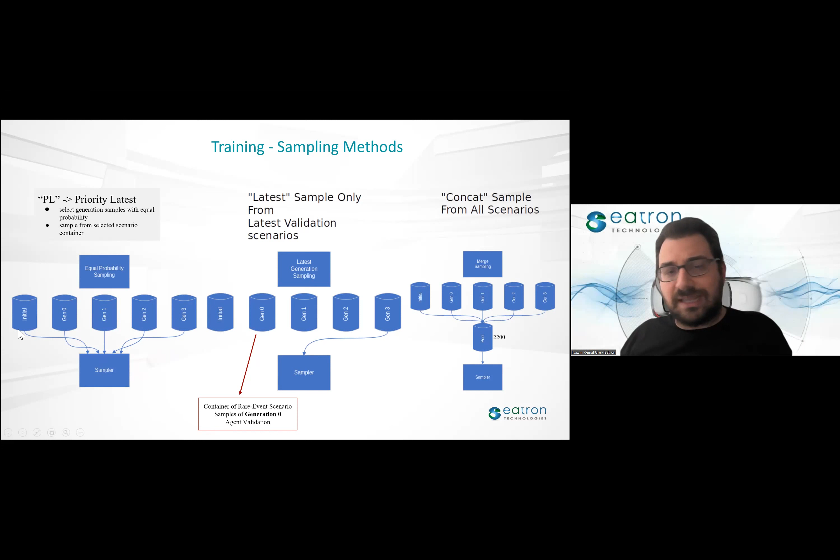Or you can give more priority to the latest scenarios, because the scenarios sampled later are more likely to be the dangerous scenarios. Or you can only train on the latest scenario. Our results tell us that the best sampling strategy is not to combine everything together, because you will be getting a lot of useless samples. Instead, use a weighted sampling strategy where you give more weight to samples from later phases of the training, so that you are more likely to sample failure scenarios, but do not get rid of all the old data; keep them as well, but give less weight to them.

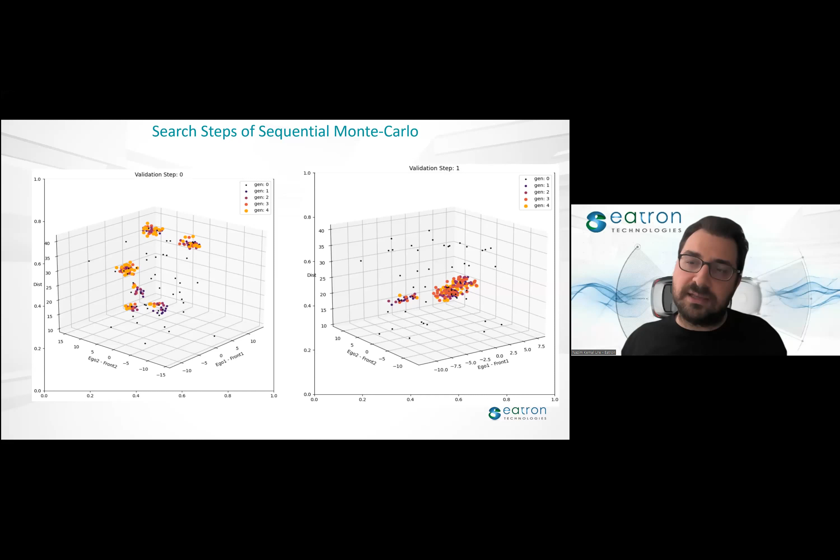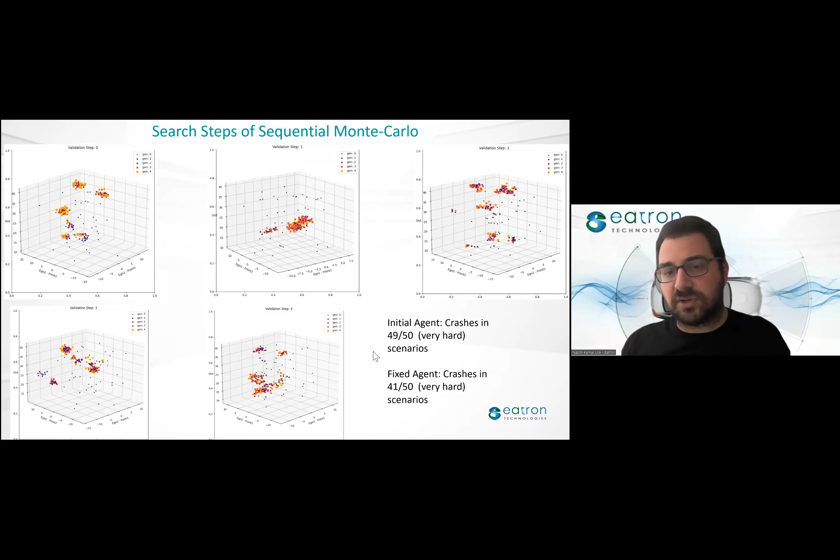And when I say very hard, I'm actually talking about very hard scenarios. Maybe even a human driver cannot get out of the scenarios where the distances are very close, or the cars are closing on each other at very high speeds. So you can detect edge cases and fix those edge cases using this type of strategy. But of course, these are just very preliminary results. We are still working on this, and hopefully, we will be able to present even better results in the future.

And for instance, if you compare the performance of the algorithm in the first iteration and the last iteration, you actually see striking differences. For example, the blue line that you see here is the performance of the ACC in the beginning of the training. So you can see that the position between the cars, it tries to close it. It actually gets very close to the car in front of it and then tries to settle down for a lower distance, okay?

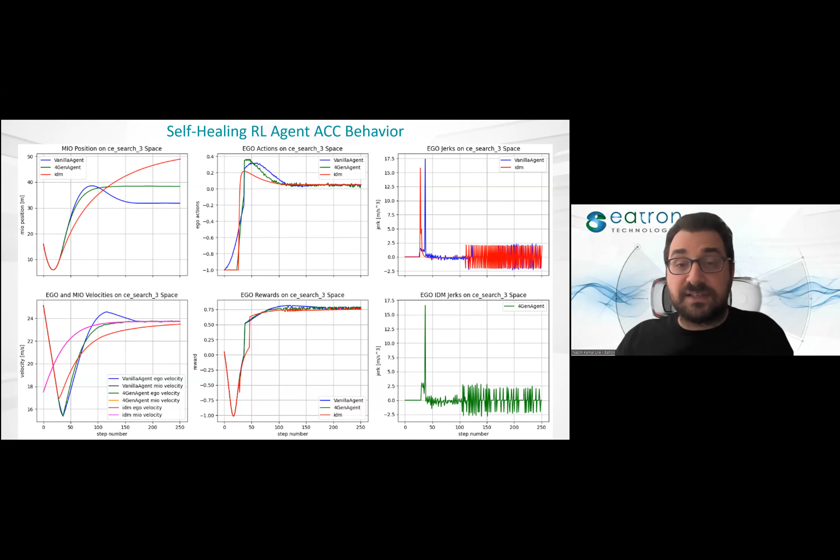But then after we fix the agent, after we retrain the agent, it actually discovers that instead of this overshooting type of behavior, it settles down into a much safer behavior. So you can actually teach your algorithm to be more safe by using this iterative testing, fixing algorithms. Okay, so the final part.

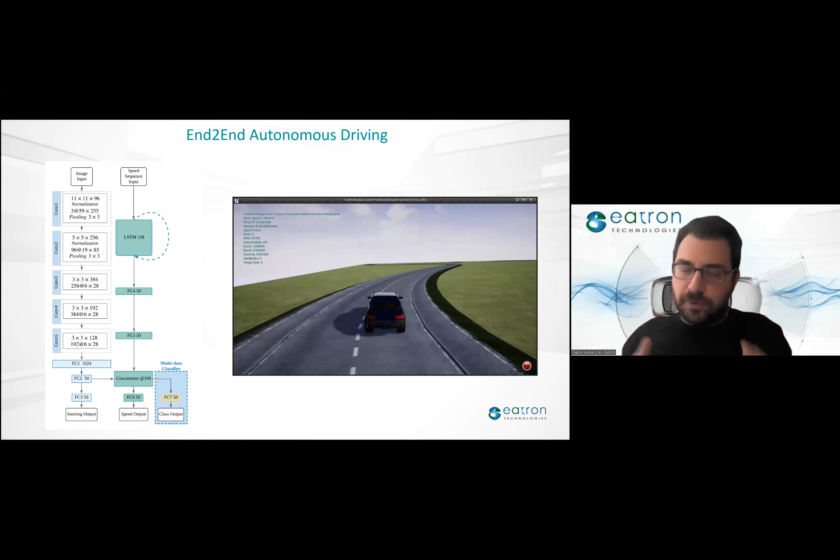So finally, I'm going to talk about end-to-end systems. In case you haven't heard of it, an end-to-end autonomous system is where you are getting your sensor inputs and passing them through a neural network, and then you immediately extract, for instance, the steering and speed output of a car. It is called end-to-end because this bypasses the whole control and perception stack. So your perception, decision-making, control, everything is just bundled into a huge neural network.

And then how do you train this neural network? Well, the most straightforward way to do that is by using supervised learning. For example, we can let an expert driver drive our car, and then we will get a lot of data from our sensor inputs, and we can record what the expert did when they see this kind of input. And then we would have this huge supervised data set, and we can then train an algorithm. And it turns out that if you collect enough data, and if you actually let the expert direct you when the algorithm is not doing well, you can get very good results.

So this is a very early result from my lab, probably 3 years ago, from a paper we published at IROS. We basically show that if you use the expert in the loop carefully, then you can actually imitate what this expert driver is doing very closely. So you can see that this car learns how to accelerate, it knows how to decelerate, it learns how to drive by itself, at least in the simulator. And it is actually impressive that you can do this in an end-to-end manner.

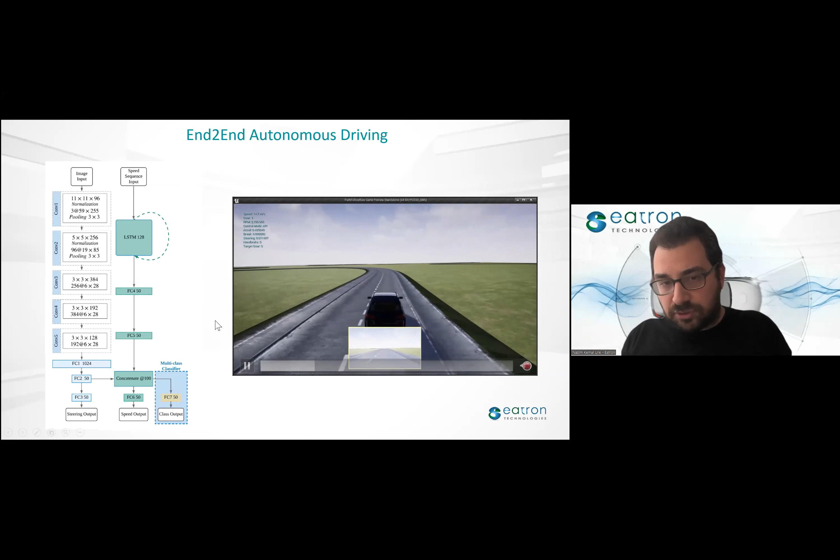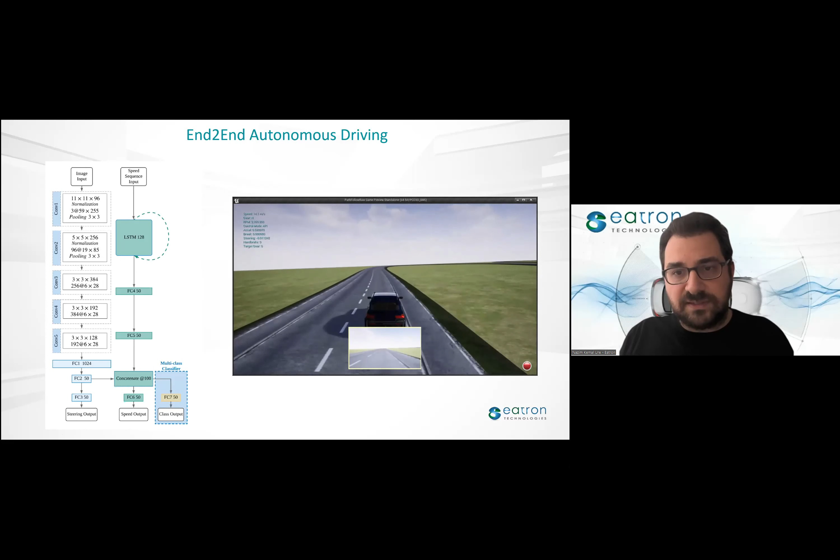Okay, but even the expert drivers are going to fail at some scenarios, especially if we are trying to imitate an existing autopilot or something like that. So if we find an instance where the end-to-end system failed, how do we fix it? That's actually an important question. The architecture that we developed is a bit complicated, but I will try to explain this simply.

So first we learn how to imitate the expert driver, and then we try to run our expert on a very complicated urban scenario, for example, a scenario that you'll see in CARLA. And then whenever our algorithm fails, we take that failure scenario, isolate it, and create what we call a mini scenario, which just simulates those failure conditions.

So this mini scenario is simulating our failure, then we retrain a reinforcement learning agent on top of that. So the idea behind that reinforcement learning agent is it should be a specific agent that just solves this type of conflict. And then after we train this agent, it becomes a part of our planning library. So whenever next time we run into a failure scenario, we ask the question, do I have something in my library that can resolve this kind of conflict?

And then if we do, then we take that agent from our library, we execute it, and then we see that we can actually resolve that edge case, resolve that scenario. If there is nothing in our library which can resolve that scenario, then what we do is we simply say that, hey, this is a new thing that I haven't seen before. We isolate that scenario, and then we retrain a new agent. So we keep expanding our library. So whenever there's a failure, we create a new agent for it, basically.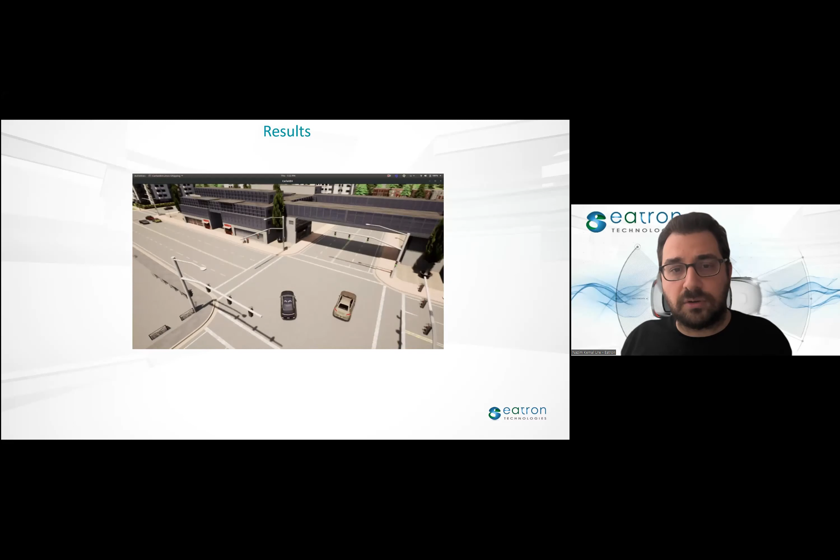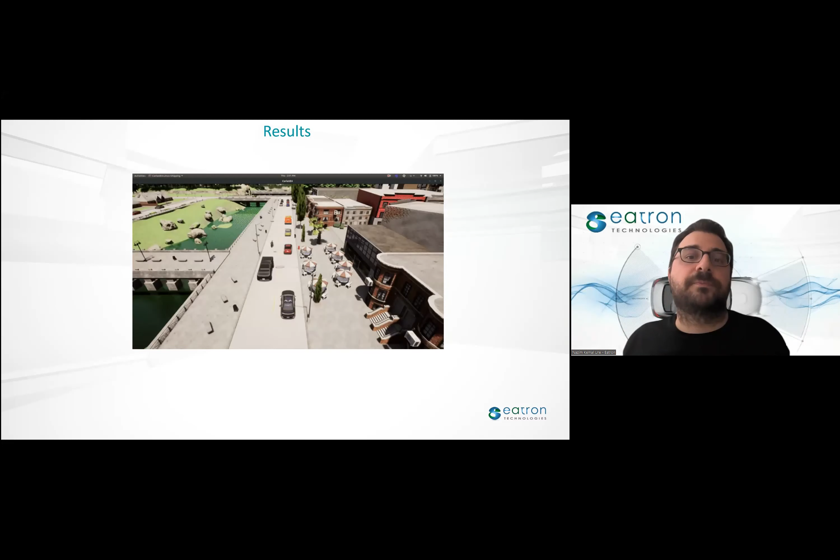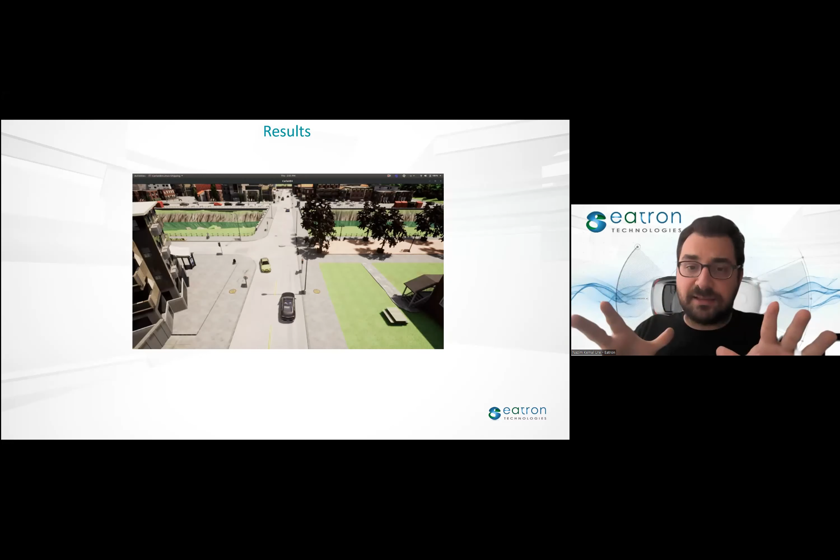So since there's not a lot of time, I'm going to skip all of this and just show you the results. So this is the expert driver, expert neural network agent, learning in the simulator. And you can see that it learns how to stop at lights. It learns how to take intersections. Whenever there's a pedestrian, like a cyclist, you can see in this case is in front of it, it can detect it and then it can learn how to stop. So you can see that some of the basic driving capabilities can be imitated very well with the imitation of the expert driver.

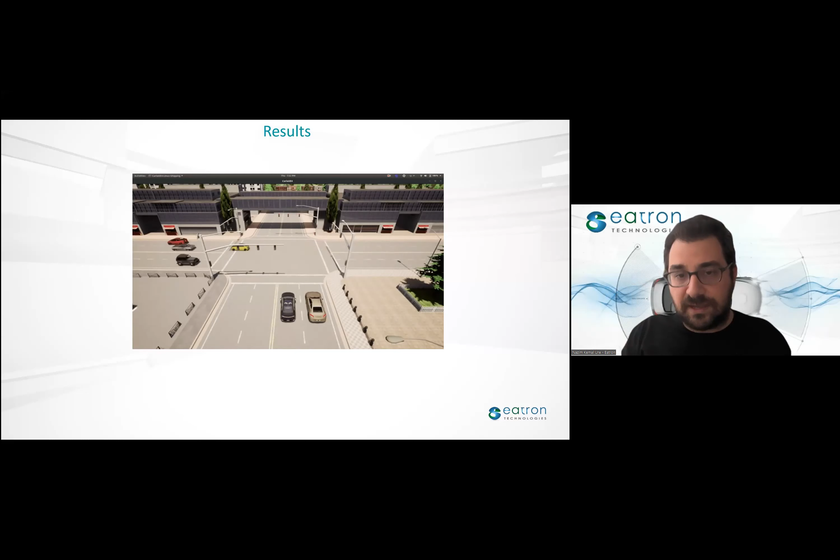Okay, but the problem is even this expert driver is not 100% safe. There will be a lot of scenarios where this thing is going to get stuck. So what we do is whenever we identify a stuck scenario, like I mentioned, we run this architecture, we isolate that scenario, train an agent, and then we now have a library of how to solve conflicts, and then we execute that to overcome that challenge. And in this case, for example, let's look at this scenario.

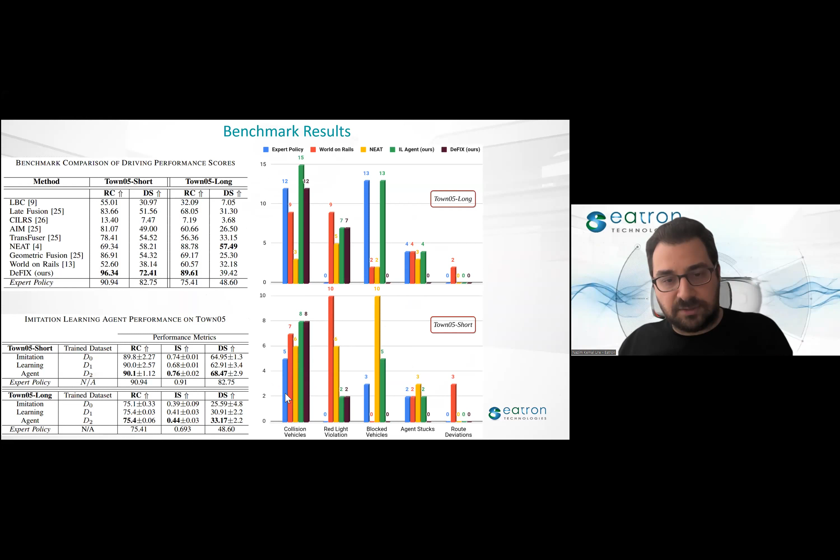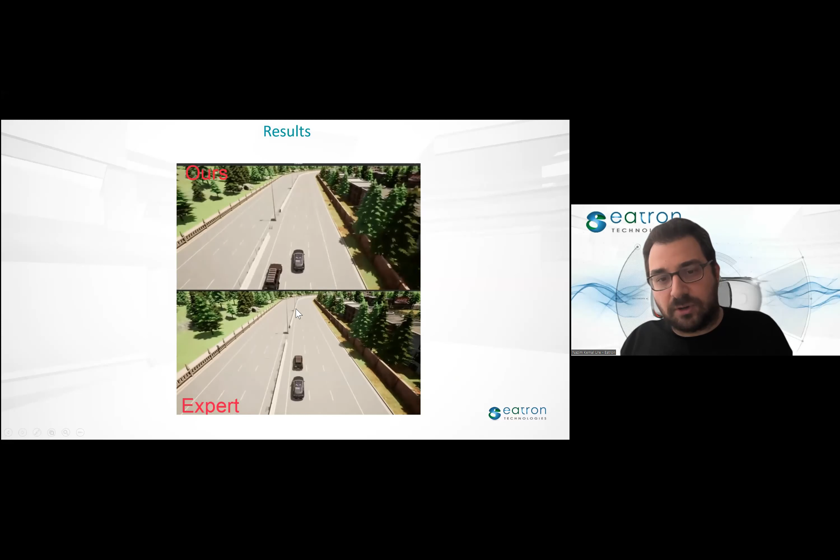In this scenario, there's a car in front of it, but our expert data actually never saw a situation like this before. So it simply gets stuck. There weren't any cases in our data set which tell us how to handle this type of scenario. So it doesn't know how to make a right turn to get ahead. So here we isolate the scenario, we give it to a reinforcement learning agent, and you can see the results on top. So whenever your current algorithm is not working, we go to our library and we execute the algorithm which can solve the conflict. And then you can see that we can basically fix the shortcomings of our current algorithm.

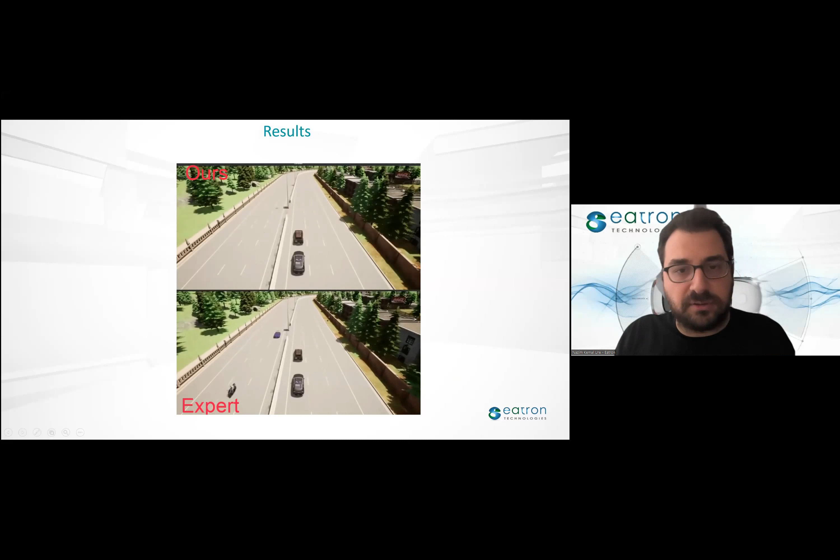Okay, so I want to briefly wrap up the presentation. What I wanted to highlight is verifying complex autonomous decision-making systems is very hard. And we definitely need to go beyond our current toolset because, like I mentioned, our current toolset cannot handle verification of complex systems very well. So algorithmic and sampling-based approaches can actually help us navigate this enormous search space. And not only can they help us navigate, they can also help us fix those failures. But still, a lot of work needs to be done.

And as you have seen, there's a lot of simulation tests, but not a lot of hardware tests. So that is a thing that we are actively working on. We basically need to verify the verification algorithms, that our algorithmic verification is actually working. So there's still a lot of work to be done. But I think this is a very promising and exciting research and application area. And as you have seen, this doesn't need to be just for autonomous driving. Any system where you need to verify safety, for example, something like a BMS system, you can also use these methods.